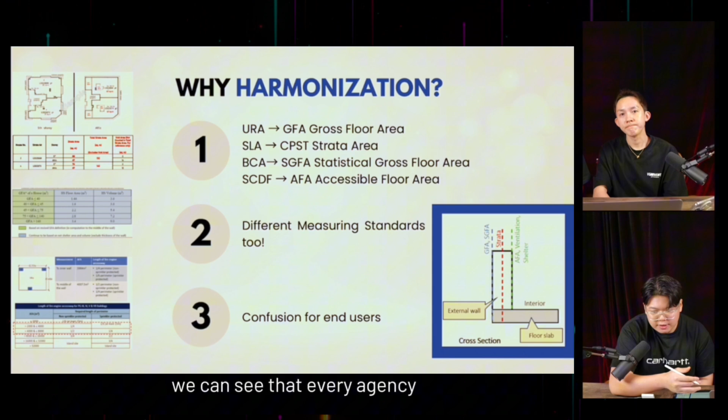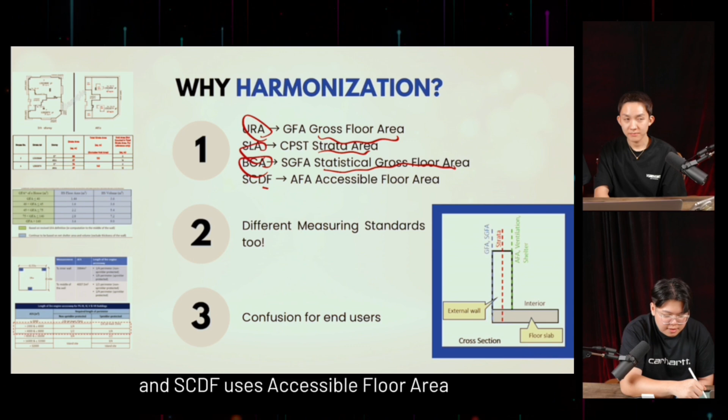Before that, I need to explain to you what is GFA harmonization first. Can you bear with me for 1 minute? Before all these changes happen, every agency evaluates floor area differently in their own way. For example, URA uses gross floor area, SLA uses strata area, BCA uses statistical gross floor area, and SCDF uses accessible floor area. Let's take a look at this figure here.

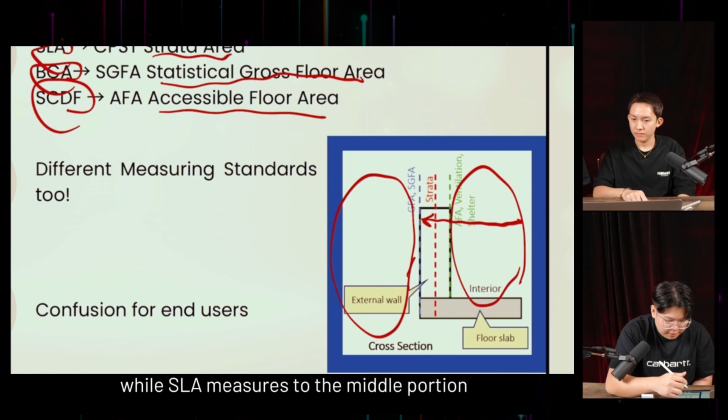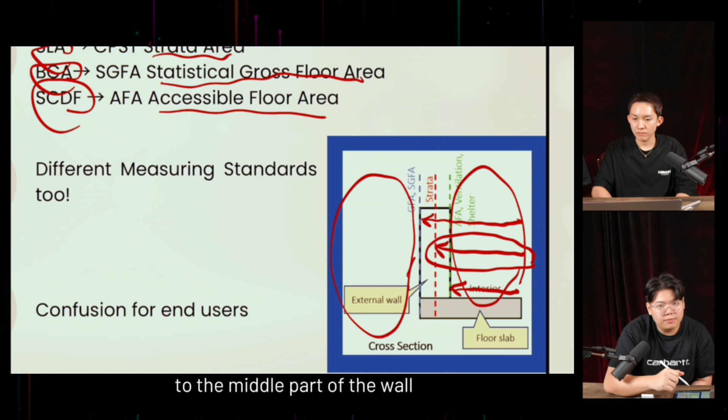Imagine this is the inside of a house and this is the external surroundings. URA measures till the end of the wall, while SLA measures to the middle portion, and SCDF measures until the inner portion of your wall. Starting with this GFA harmonization, they standardize it accordingly to the middle part of the wall, so now they measure all towards the middle portion of the wall.

So what is most important for consumers to take note of is that voids will actually be excluded from the strata area, and that includes things like the aircon ledge. Because in the past, these aircon ledges were not part of URA's gross floor area, but it's still considered under SLA strata area.

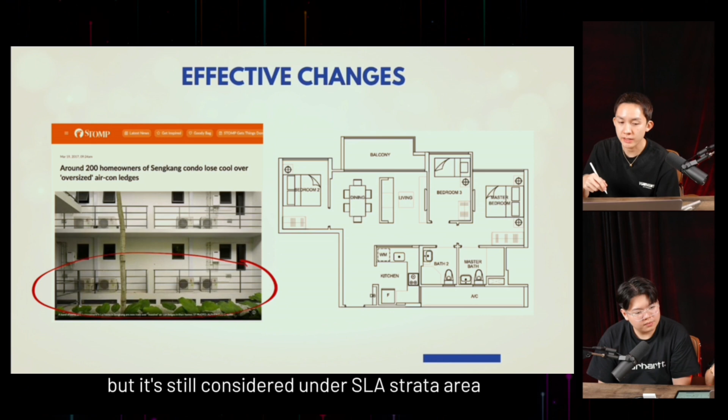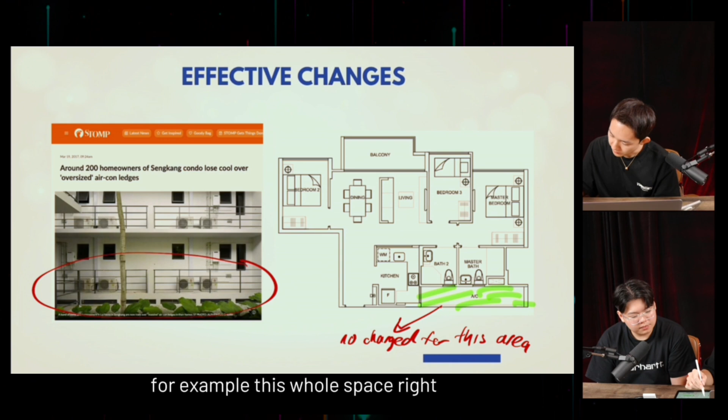So what do I mean? Let's take a look at this part - this is the aircon ledge. Developers in the past were not charged for this area. When they sell you this unit, for example, this whole space including the aircon ledge, they can actually sell you this whole space. This part, aircon ledge also, they can sell to you.

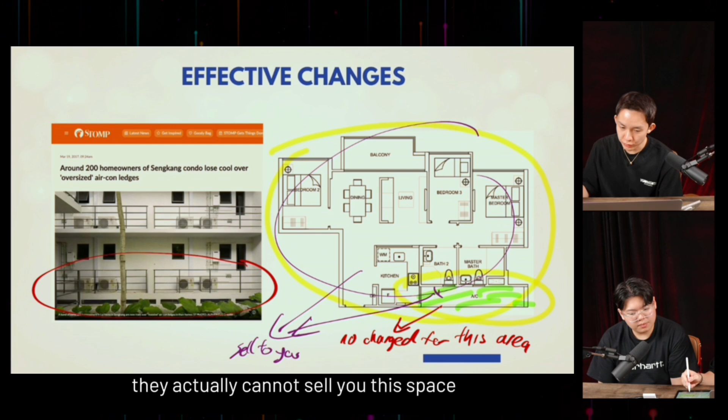So with them being able to sell you this aircon ledge for extra profit, with these new rulings now, they actually cannot sell you this space without getting charged. That means most of the new developments nowadays, the AC ledges won't be so big as last time anymore, and that also means their profit margins will be reduced.

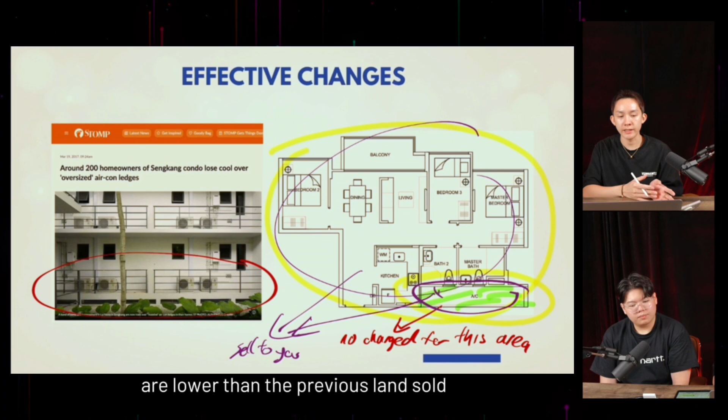That's why some of the recent land bid prices are lower than the previous land sold. End up, the selling prices of all these new properties, the PSF can still be higher than the old ones, because now the break-even cost for them has become higher.

Let's find out. Hey Jay, at first glance, which one do you think is more worthwhile to buy? Let me take a look. So from here, I think that Hillock Green is a bit worth it lah, because I top up another 100 to 200,000 more, I get so much more space.

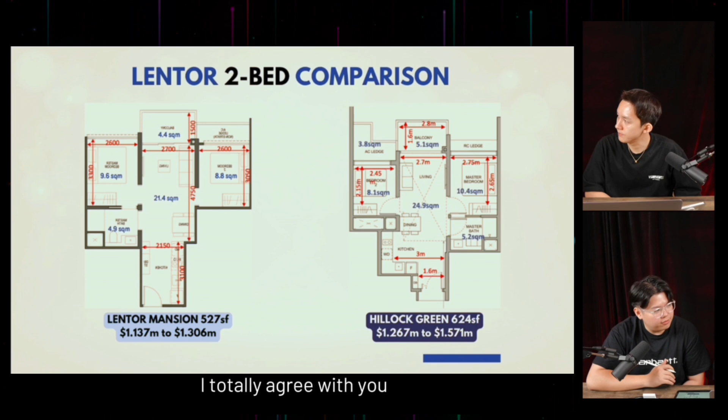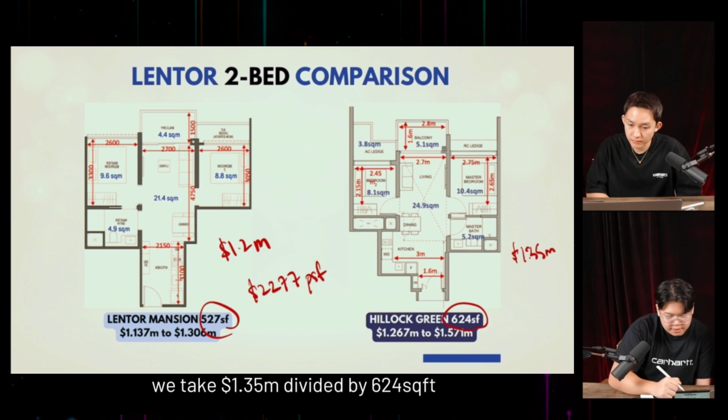I totally agree with you. On paper, it's very obvious that Hillock Green is more worth it. However, let's calculate out the average per square feet price together and compare. Let's say we take 1.2 million divided by 527, we get 2277 PSF. Whereas for Hillock, we take 1.35 million divided by 624, we get 2163 PSF, which is 100 PSF cheaper overall.

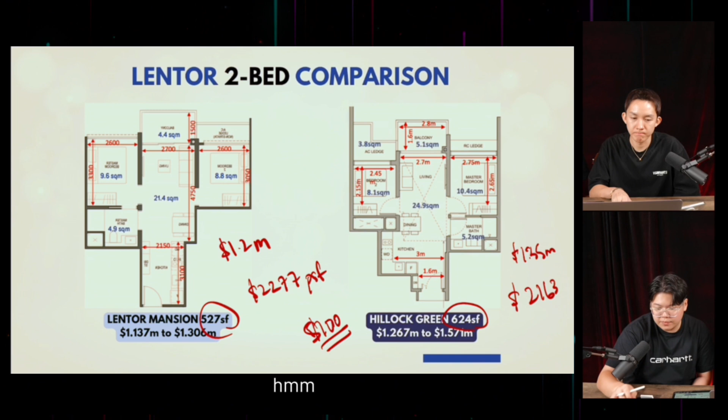So of course at first glance, people will feel that Hillock Green is actually more worthwhile to buy. But let's take a deeper insight on the layouts.

Living is 21.4 for Lentor Mansion and 24.9 for Hillock Green. Whereas for balcony is 4.4 for Lentor Mansion and 5.1 for Hillock Green. Master bedroom 9.6 for Lentor Mansion and 10.4 for Hillock Green. Bedroom 2 will be 8.8 for Lentor Mansion and 8.1 for Hillock Green. Master bath 4.9 for Lentor Mansion and 5.2 from Hillock Green. And regarding the aircon ledge, it is not included for Lentor Mansion, but for Hillock Green is 3.8 square meter, which is included in the GFA.

So with total usable space calculated at 49.1 square meters for Lentor Mansion and 53.7 square meters for Hillock Green, we'll convert the square meters into square feet at 527 square feet and 578 square feet for Lentor Mansion and Hillock Green respectively.

I'll calculate the revised price per square foot, taking the same price as calculated earlier of 1.2 million for Lentor Mansion and 1.35 million for Hillock Green. Lentor Mansion's PSF remains the same at 2277 per square foot, whereas for Hillock Green, it increased to 2335 PSF.

Now Jay, which one would you pick? Wow, I didn't know it's like that. Don't worry, before becoming a realtor, I also didn't know about this. It shows how much difference the aircon ledge makes, from an expensive property looking cheaper and vice versa.

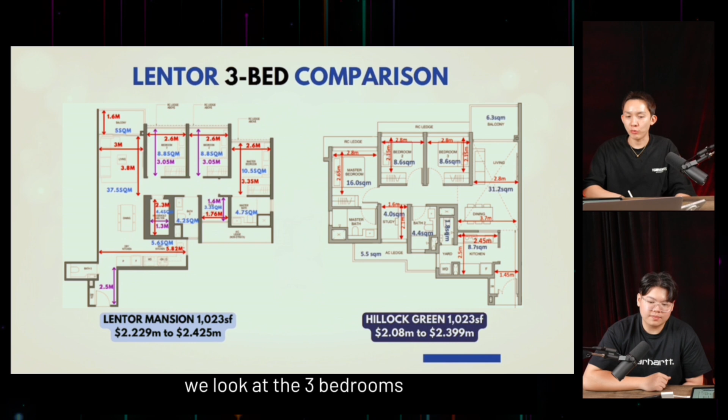So now when it comes to the two projects, instead of 2 bedrooms, we look at the 3 bedrooms. Will the results be the same? Here, Lentor Mansion, 1023 square feet, transacted from 2.229 million to 2.425 million. While Hillock Green, same size at 1023 square feet, transacted 2.08 million to 2.399 million.

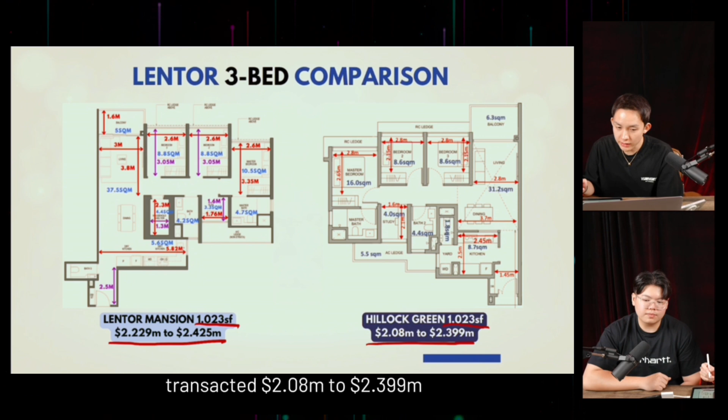What do you think? To be honest, I'm not so sure because I'm not sure if I'm overpaying for the aircon ledge at Hillock Green. Let's find out. So now let's break down the sizes.

For living and kitchen, in Lentor Mansion, it is 37.5 square meters plus 5.6 square meters, total 43.1 square meters. While Hillock Green, living and kitchen, 31.2 square meters, add on with 8.7 square meters for the kitchen, total is 39.9 square meters.

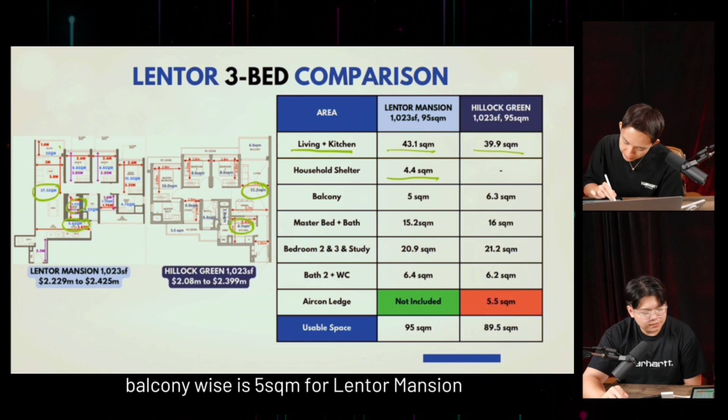So Hillock Green doesn't have a home shelter, but they have a study room, while Lentor Mansion has a home shelter at 4.4 square meters. Balcony-wise, it's 5 square meters for Lentor Mansion, with 6.3 square meters for Hillock Green.

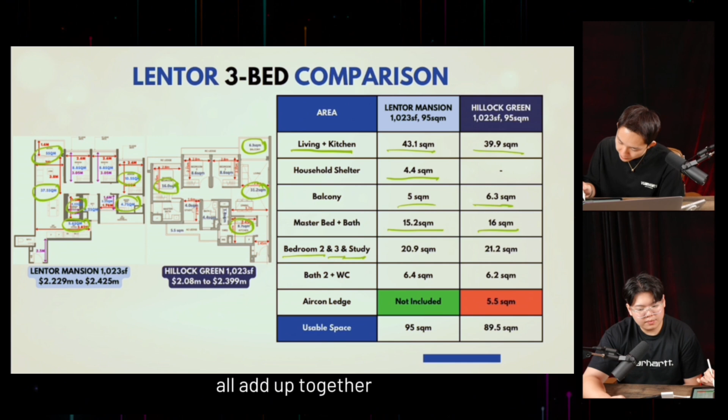For the master bedroom and bath, 10.5 square meters plus 4.7 square meters equals 15.2 square meters for Lentor Mansion. Hillock Green is 16 square meters for both. Bedroom 2, bedroom 3 together with study, all add up together, is 20.9 square meters for Lentor Mansion, while Hillock Green is 21.2 square meters.

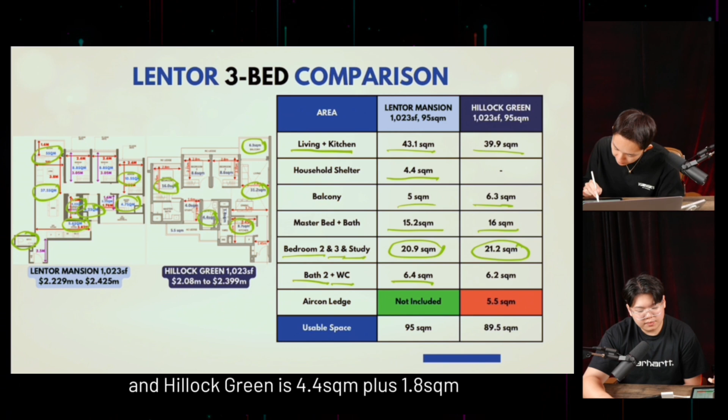And the second bath and WC, we have 4.2 square meters together with the WC, ending up with 6.4 for Lentor Mansion. And Hillock Green is 4.4 square meters plus 1.8 square meters, total is 6.2 square meters.

For the aircon ledge, for Lentor Mansion it is not included as seen here, non-strata. For Hillock Green, it's 5.5 square meters here. So effectively, 95 square meters from Lentor Mansion, while Hillock Green is 89.5 square meters.

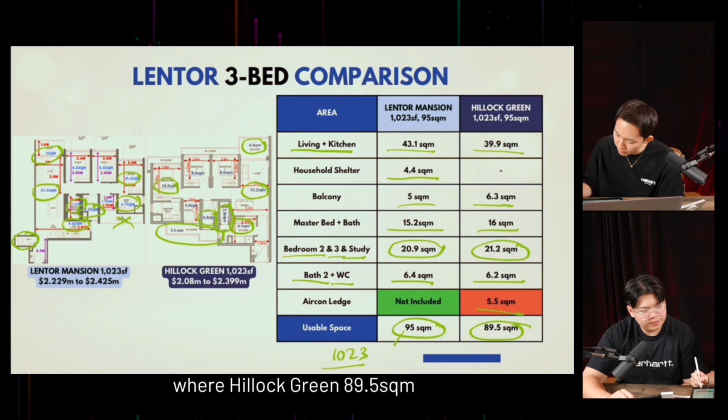When I convert this to square feet, Lentor Mansion will be 1023, same as the previous calculation because this one is already harmonized. While Hillock Green, 89.5 square meters equates to 963 square feet.

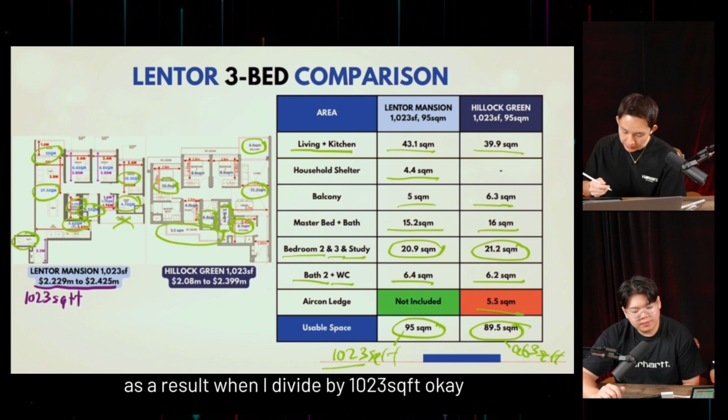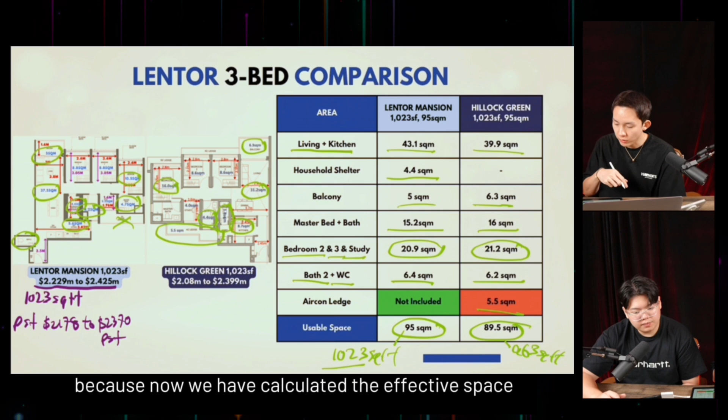So to sum it up, effectively from here, Lentor Mansion, 1023 square feet, price range from 2.229 to 2.425 million. When I divide by 1023 square feet, the per square foot ranges from 2178 to 2370 PSF. On the other hand, Hillock Green, because now we have calculated the effective space without the aircon ledge, the size is 963 square feet.

So with the price transacted at 2.08 to 2.399 million, effectively the PSF changes to 2159 per square foot to 2491 per square foot. So in this case, the per square foot is about the same already, and I might be able to get a lower per square foot at Hillock Green.

In fact, I don't even have to pay 200,000 more just to get a 3-bed 3-bath. From Hillock Green, I still get a yard, and I can also use the study space here as a storeroom.

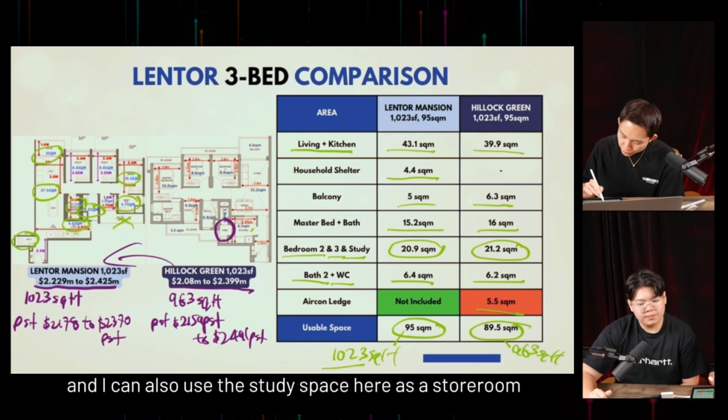So Daryl, does it make sense to buy a harmonized project or not? Or does it make more sense to buy a non-harmonized project? Jay, to be honest, I don't think there's a fixed answer.

We can see from the example just now, on one hand, harmonized is better because the space is more efficient. Another example, the price is more worth it despite having the aircon ledge counted in. And for every project, it's different.